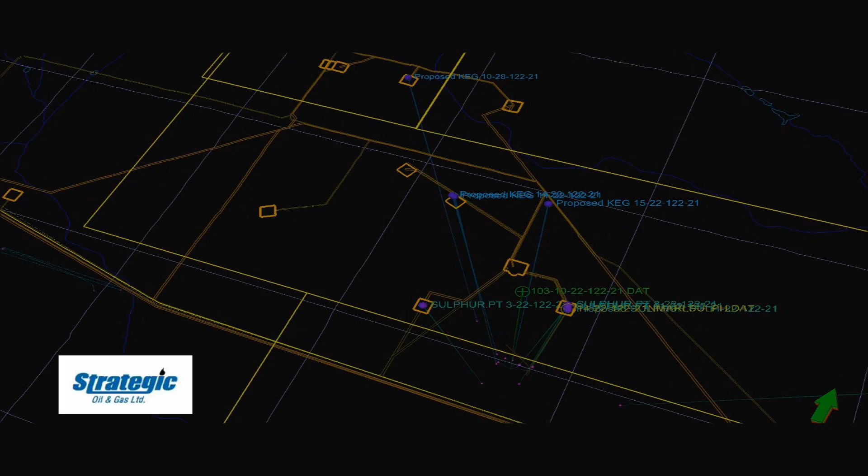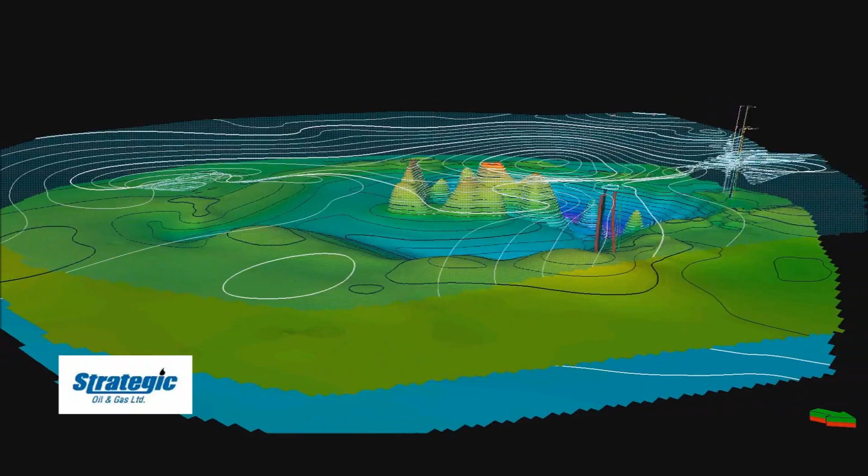A variety of data has been assembled into this 3D model, from sources such as 3D seismic, the well control, and regional aeromagnetic data. Fault-bounded basement blocks can be seen in the centre of the crater extending to within 200 metres of the surface. Two of the structures shown with well bores penetrating into the Keg River are two fields operated by Strategic.

The largest of Strategic's operated fields is North Marlow, shown here. This is the structure at the Keg River level. It is likely a combination of fault and dip closure.

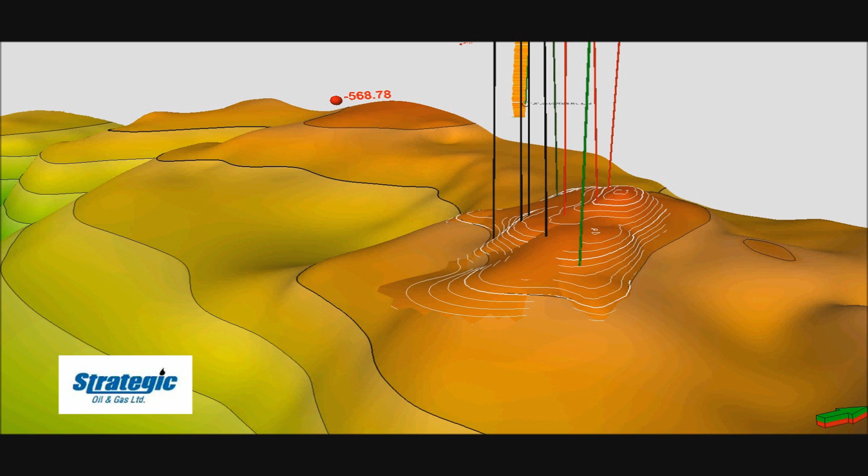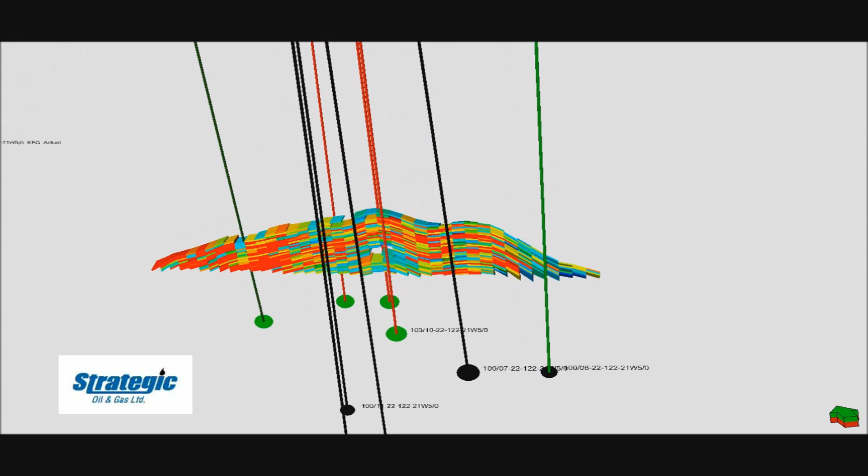Combined with the well data, a 3D model has been constructed. The oil-bearing pay zones in the reservoir tend to be thick and are best exploited using deviated wells, drilled from 3 to 4 surface locations. The 3D model is being used to better understand the internal distribution of the porosity and the permeability, and the controls on the high producibility of the wells.

The model is composed of millions of cells, each containing information of the reservoir properties, and using this technique, integration and visualization of the reservoir parameters is achieved.

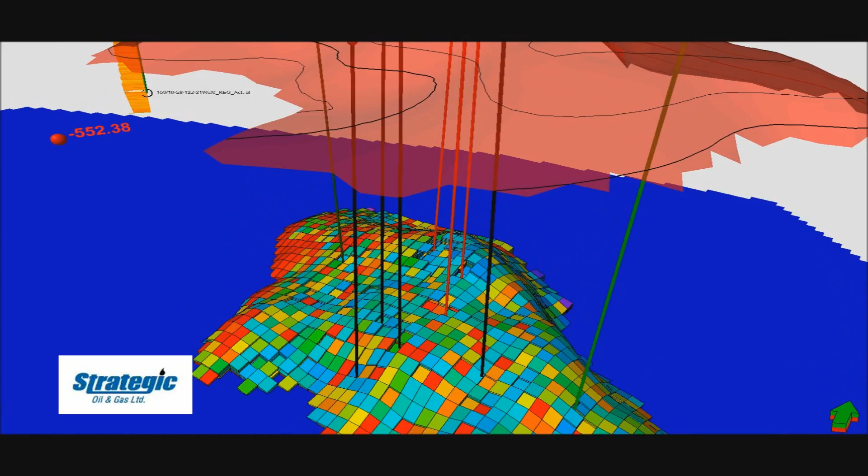Lying structurally above the Keg River is the Sulphur Point. This formation is a sheet-like dolomite draping the Keg River below. Typically it is 4 to 5 metres thick.

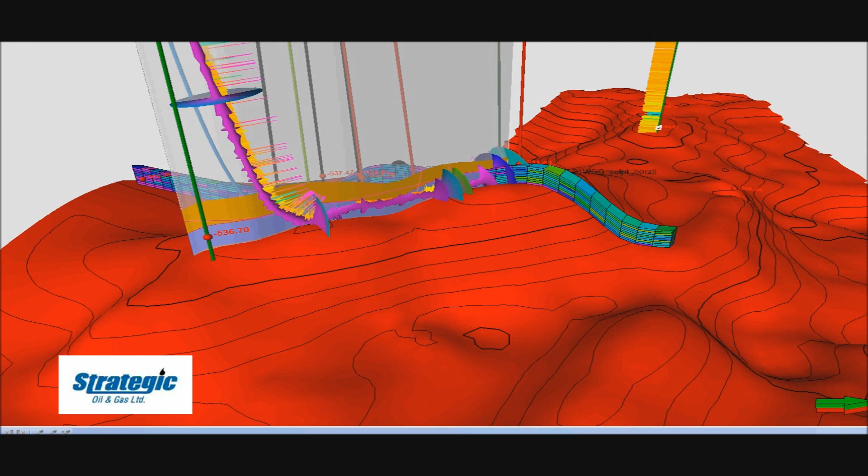This has also been modelled in 3 dimensions and helps with the planning control of horizontal wells shown here that are now being drilled to exploit this zone.

Real-time planning of horizontal wells has helped in understanding variability within the Sulphur Point, and as shown here, plotting parameters such as the rate of penetration while drilling has helped to indicate the most highly porous and permeable rock zones.

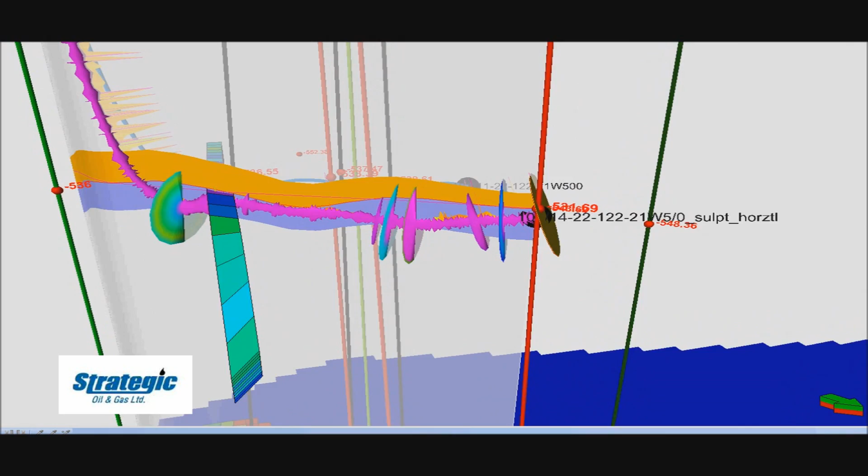2 wells have been drilled into the Sulphur Point shown here, and the dual zone potential of this reservoir, both Keg River and Sulphur Point, has led to a good production and reserves growth.

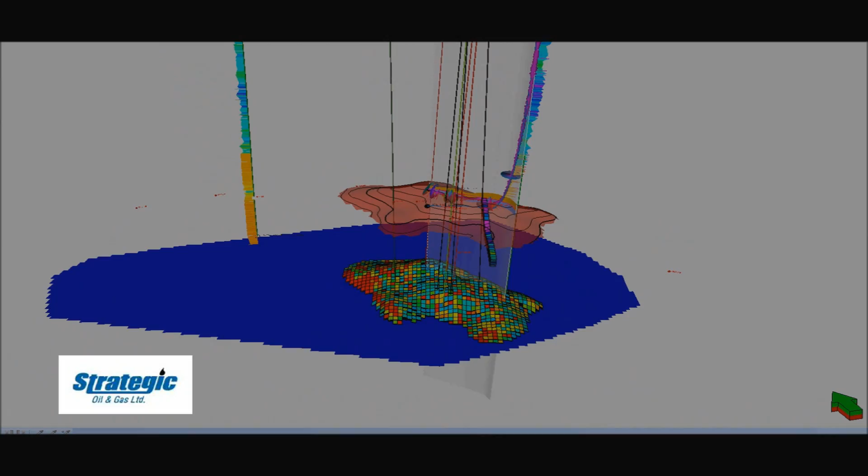3D seismic coverage shot by Strategic during 2011 around the crater rim has helped identify additional structures such as that shown here. Step-out wells 1 to 2 kilometres from the existing North Marlow field are being drilled.

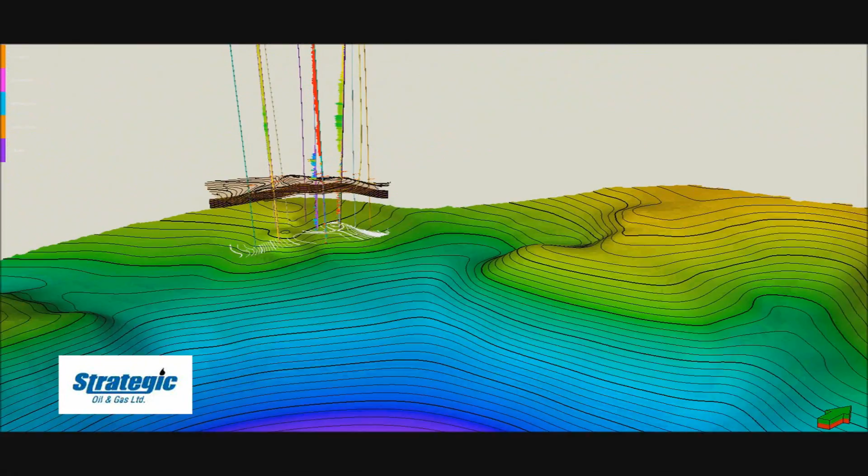West Marlow field is the second field operated by Strategic. Shown here is the structure on the top of the Keg River formation in 2D and in 3D.

Estimates of 3 million barrels of oil in place have been estimated, and with only 300,000 barrels produced, this still has plenty of upside remaining. 3D modelling is again helping to identify the producing zones.

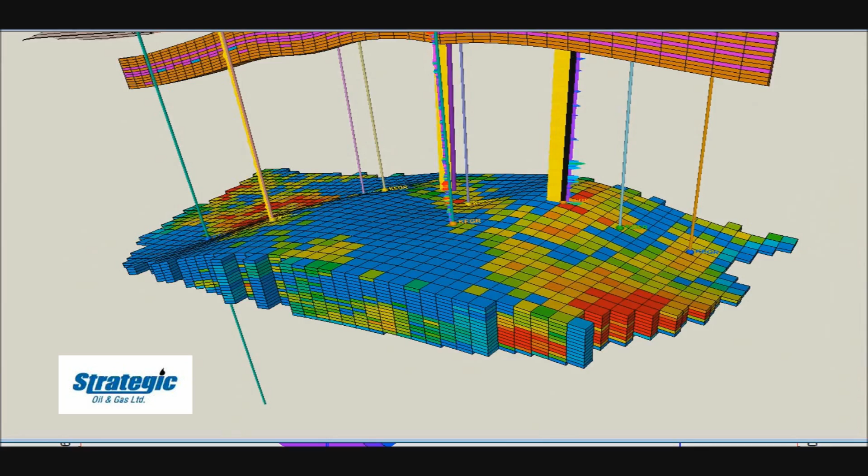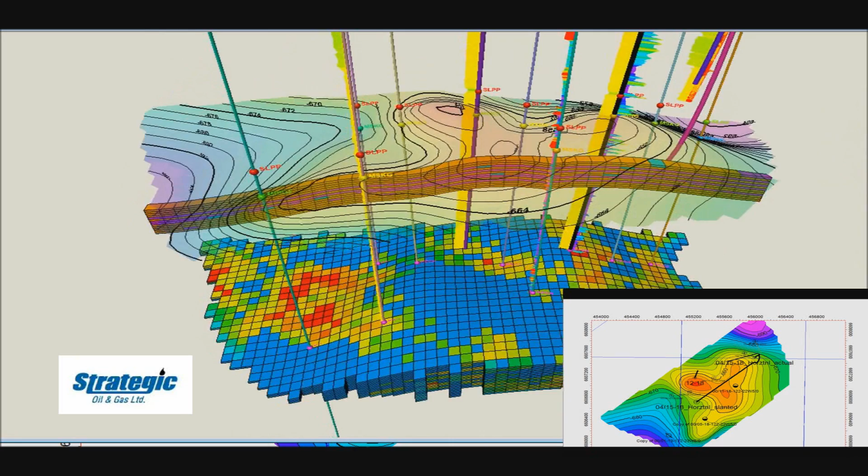Lying above the Keg River is the Muskeg Formation, and here this is being exploited using horizontal wells. This is going to be a new pool, as yet unproduced. The slant horizontal wells shown here penetrate layered dolomites with an overall thickness of 10 to 15 metres. Intersecting the multiple layers will help increase producibility from these wells.